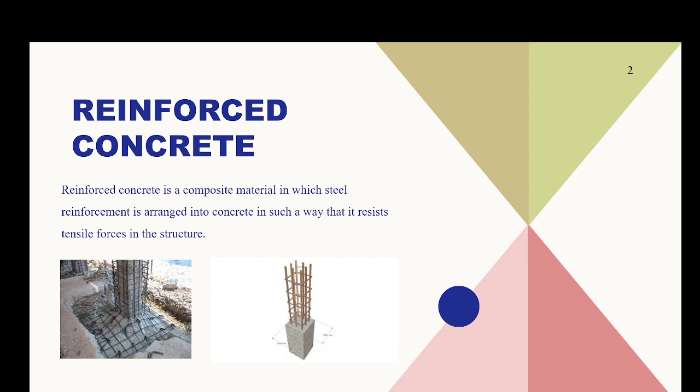Next, reinforced concrete forming materials. First is cement. Cement is a material with adhesive and cohesive properties that allow the attachment of mineral fragments into a solid mass. The cement material becomes hard due to water, which is called hydraulic cement. The hydraulic cement commonly used in concrete is Portland cement, which generally takes about 14 days to reach sufficient strength and 28 days to reach full strength.

Second is water. Water is a main ingredient in concrete mix because it causes cement particles to bind together, both between particles and with steel reinforcement. So water is what makes up the cement and other particles bind together and become strong.

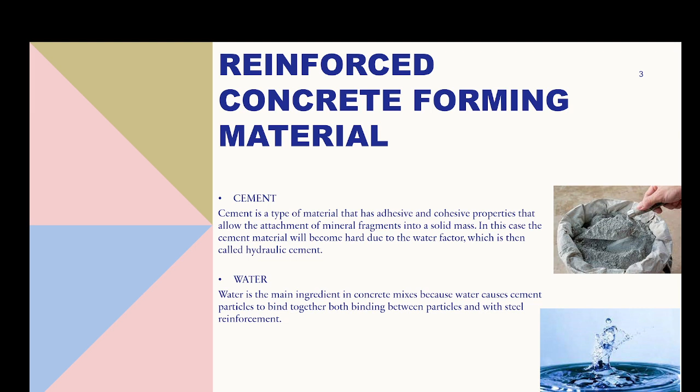Next is aggregate. In concrete materials, aggregate makes up about 75% of the total content of concrete, so the behavior of concrete is greatly influenced by the properties of aggregates. Aggregates usually consist of two types: fine aggregates, which are generally sand, and coarse aggregates, which are generally gravel. A fine aggregate is material that passes through a number 4 sieve, and coarse aggregates are materials that are larger in size.

The next one is admixtures. Admixtures can be used to change the properties of concrete to make it function better and more economically. Some functions of admixtures are: 1. Increasing binding power without adding water content, so we can make the bonding power better without adding a lot of water. 2. Accelerate the development of strength at an early age. And 3. Increase strength, and the last one is increase resistance to deterioration due to freeze-thaw cycles.

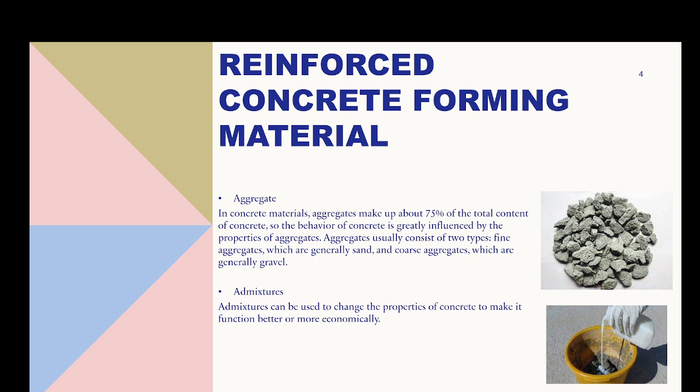The next topic is factors to consider in the application of reinforced concrete in conventional house construction. The first one is structure design. We need to ensure that the design of the reinforced concrete structure has been made by an experienced structural engineer and complies with applicable standards.

The next one is construction materials. We need to use high quality construction materials such as strong and good quality concrete, standardized reinforcing steel, and other materials. Next is foundation planning. Ensure that the foundation of the house is carefully designed to withstand structural loads and local soil conditions.

The next one is concrete quality. We need to pay attention to the correct concrete mix ratio and ensure that the concrete mix has adequate strength. Next is reinforcing steel selection. Determine the type and size of reinforcing steel that is appropriate for the structural design and expected loads.

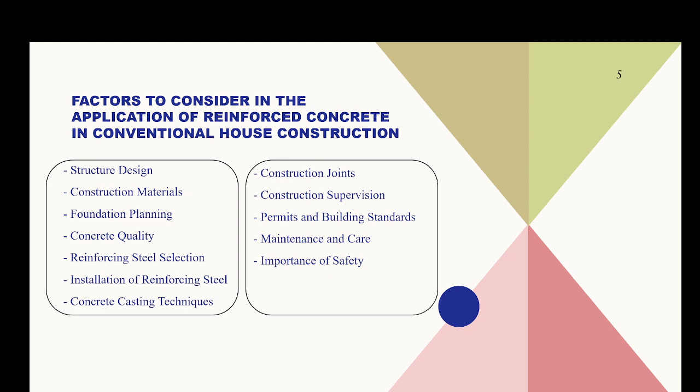Okay, next slide is the use of concrete in house structure. First, foundation. Concrete is used to create the foundation of a house to provide a strong and stable foundation. We can use concrete as the foundation of our house. And then flooring: concrete is cast to create a strong and durable floor.

Next is walls. Concrete is also used to make walls, both as structural walls and as dividing walls between rooms. Next is columns and beams. Reinforced concrete structures are used to make columns and beams that support the building vertically and horizontally. The last one is stairs. Concrete is often used to make stairs in homes.

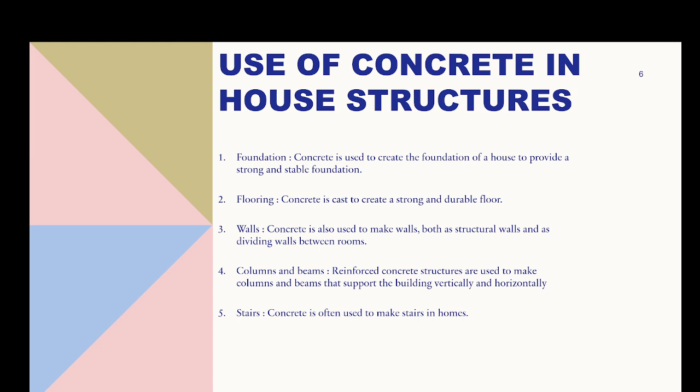So that is the use of concrete in house structure. Next, we move to the role of reinforced concrete in enhancing the structural strength of houses.

The first one is structural strength. Reinforced concrete is capable of bearing heavy loads, providing the structural strength necessary to support significant floor loads. Reinforced concrete is a good material for carrying heavy loads, so it is good to use in the structural elements of our house.

Second, resistance to external pressure. Reinforced concrete can withstand external pressure such as wind and storm, adding to the safety and sturdiness of the building structure.

The third one is fire resilience. The reliability of reinforced concrete makes homes more resistant to fire, increasing the level of safety in fire situations. So we can use reinforced concrete in our house because it has good reliability to resist fire.

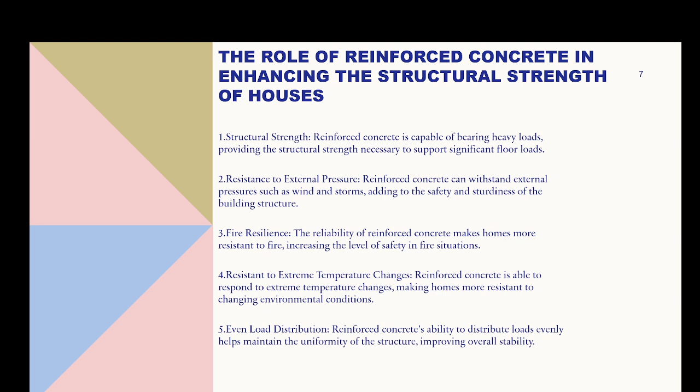Next, we move to the impact of reinforced concrete use on the resilience of residential houses to earthquakes. Reinforced concrete strengthens structure and increases earthquake resistance. During earthquake tremors, reinforced concrete can resist lateral forces, reducing the risk of damage and providing additional stability to foundations.

The excess strength of reinforced concrete maintains the structural integrity of the building, makes it more elastic, and reduces potential damage during an earthquake. So with reinforced concrete, when the earthquake comes, it makes the structure of our house more elastic, reducing the potential damage for our house during the earthquake.

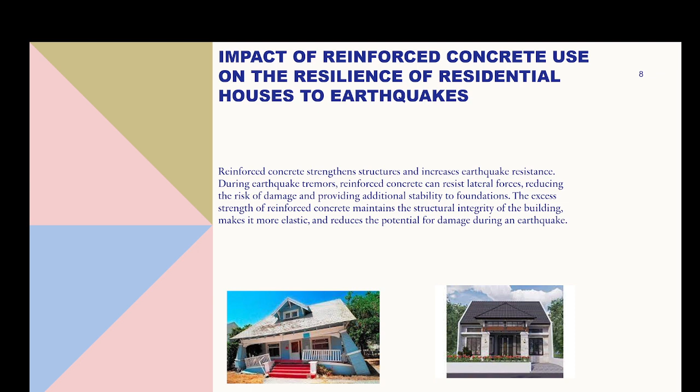Next, what is the cost and time efficiency of residential construction utilizing reinforced concrete? Construction using reinforced concrete can speed up the building process for these reasons.

First, quick drying capability. Reinforced concrete has the ability to dry quickly, which allows follow-up work to be carried out earlier than when using other construction materials that require longer drying times.

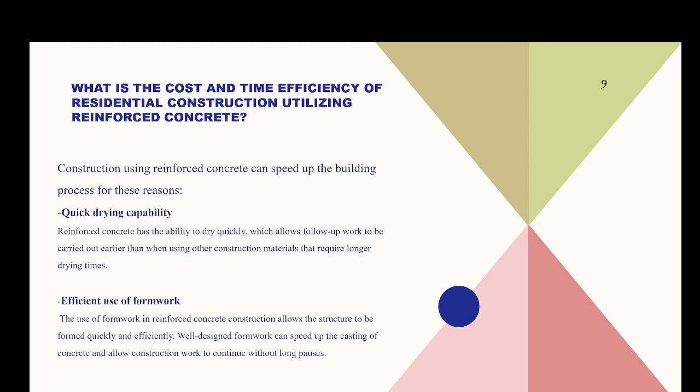The second one is efficient use of formwork. The use of formwork in reinforced concrete construction allows the structure to be formed quickly and efficiently. Well-designed formwork can speed up the casting of concrete and allow construction work to continue without long pauses.

The third one is early loading capability. Reinforced concrete can support structural loads earlier than unreinforced concrete. This allows construction work to continue without waiting for the concrete to reach full strength.

The last one is larger scale of production. The use of reinforced concrete allows for a larger production scale, especially in mass construction projects. The installation of reinforcement and casting of concrete can be done simultaneously in different parts of the structure. That is the cost and time efficiency of residential construction utilizing reinforced concrete.

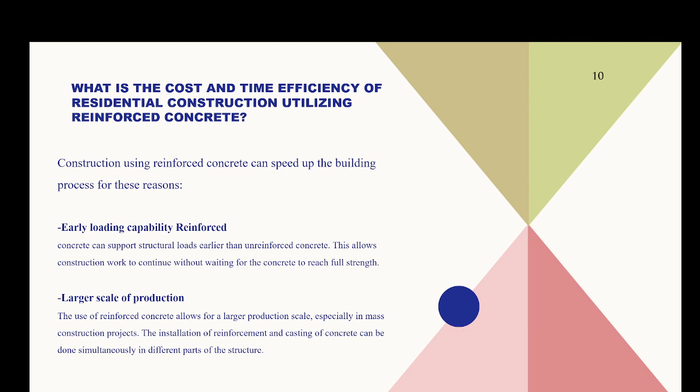Next, what are the needs and preferences of residential occupants that can be met through design using reinforced concrete? The first one is structural stability. Reinforced concrete increases stability, providing a sense of security against earthquakes and natural disasters.

The second one is ample space. The design supports the creation of large rooms, flexible for family needs or special hobbies. With reinforced concrete, the design can be more creative because the house has a good structure, so the designer can be more creative in designing the model without worrying about loads on the structure.

The next one is layout flexibility. The reinforced concrete structure allows for customizable layouts by creating living spaces, rooms, and other functions as needed.

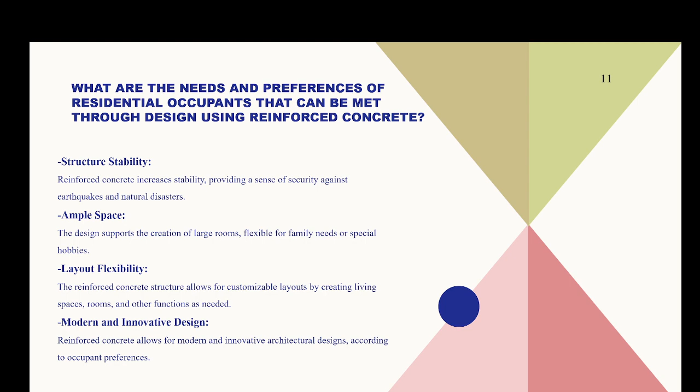Next one is energy efficiency. Reinforced concrete's thermal insulation creates a comfortable environment and energy efficiency all year round.

The last one is safety and sustainability. Durable and recyclable reinforced concrete ensures long-term safety and sustainability with minimal maintenance. This will decrease costs, and the occupants of the house will spend less money to take care of the house.